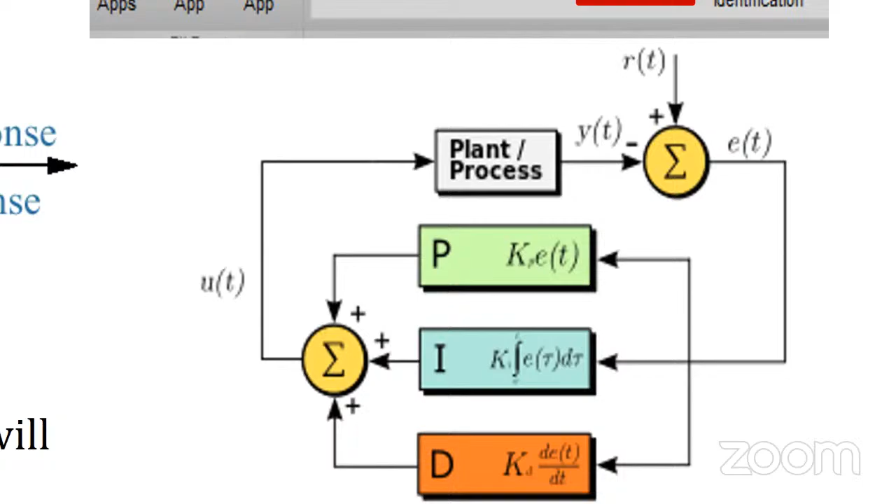Okay, so this is the basic idea of the control system.

So this is the design cycle. First we determine the physical system and specifications from the requirement. Then we draw the functional block diagram, whatever be my system. Suppose I am talking about the RLC circuit - resistor, inductor, capacitor - this is basically the physical form of a network. Now if I want to represent it in a block diagram based presentation, then we can do that way. After that, we can transform the physical system into the schematic.

In a schematic we can transform it, and after that the signal flow - you can see that the signal flow is in a particular direction, not in a haphazard manner. If I consider this is my reference input, the flow is like that way, this is unidirectional, and after that it will reach here, yt. If there are multiple blocks, you can consider these are basically the blocks. If I consider this is a multiple block for a closed loop system, we can use the block diagram reduction technique to reduce the number of blocks, and finally we analyze and test the system under all conditions.

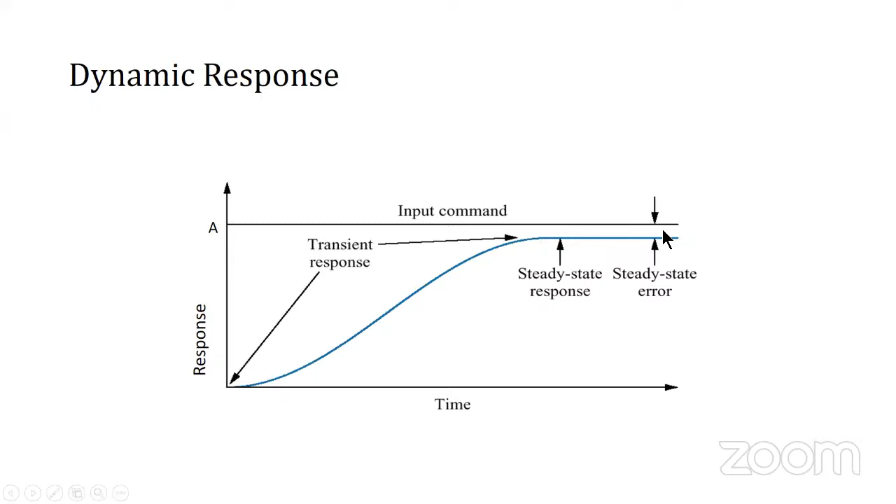So here you can see that this is my actual output, and this is my desired output - this is my input command. So if we subtract it, then you will get ESS, which stands for the steady state error.

Now next thing is the two types of control system. One is called the open loop control system, another is called the closed loop control system. So what is open loop control system? It is very easy - there is no feedback or no closed path. So without feedback, or a non-feedback control system, is basically called the open loop control system.

So here you can see, if you look here, there is a closed path - this is called the feedback path. But here you can see there is no feedback path, so without a feedback path, this is called the open loop control system. In this open loop control system, basically the control action is independent of the desired output or the controllable output. So here you can see this is our output, or the controllable variable. This control action is basically independent of the desired output - you can apply your input, but here you can get a certain output.

But in case of the closed loop control system, here you can see you can apply, you can use the transducer as well as the controller - this is called the summing junction. The main advantage of this open loop control system is that you can easily design that kind of system.

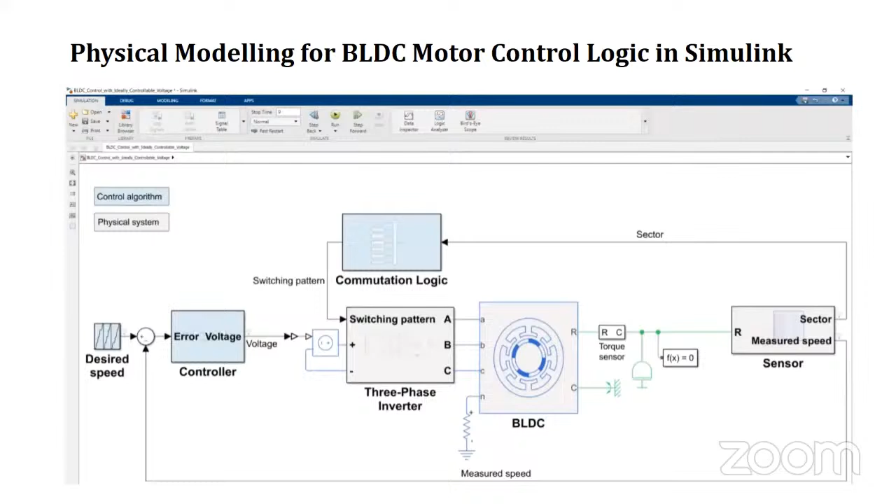For mechanical action, since we have to measure the speed as well as the torque, because we need to know the speed-torque characteristics of the DC motor, we should apply the torque sensor and other mechanical components. After that, if you simulate it, you will get that kind of output. For switching pattern, we can apply some pulse width modulation. So this is the physical modeling of BLDC motor in MATLAB.

I think you got some idea. So if I am talking about the open loop control system and closed loop control system, how we can approach these things, I think you got some idea from here. Now I am directly moving to MATLAB.

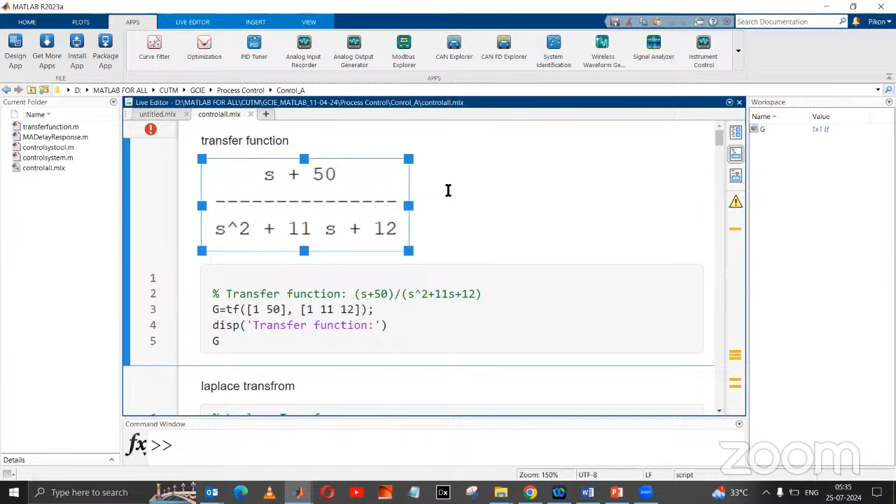Generally there are different types of transfer functions for different systems. So first, S plus 50 - this is represented by numerator and denominator, which represent the poles and zeros.

If TF equals 0, for which value or root the transfer function will be 0, then this root will be considered as the zeros of the system. Basically, the zeros of any transfer function are those values of S which make the transfer function, or G(S), tend to 0 or equal to 0. So for which values the transfer function will be 0, that is considered as the zeros of that system.

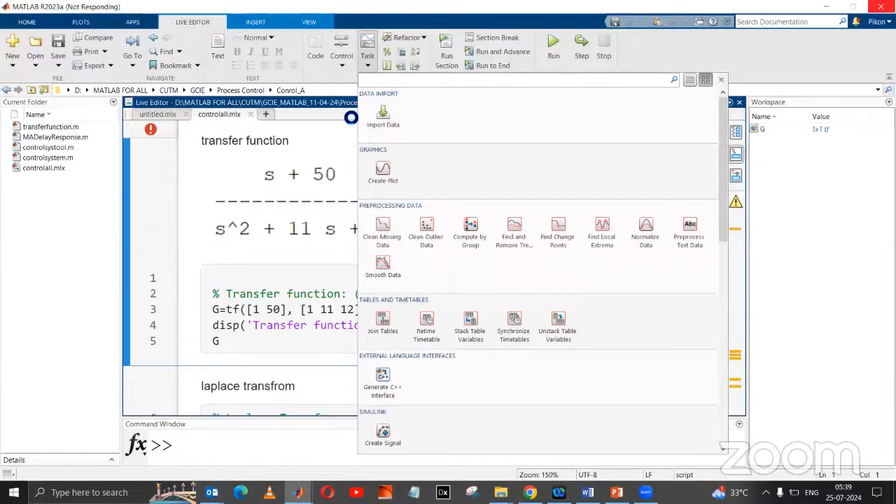In this live editor task, you can see this is the transfer function. This is my coefficient. What is the coefficient of S? 1, and it is 50. So it is written here as 1 space 50.

Next, S square plus 11S plus 12. So for S square, what is the coefficient here? 1, and the coefficient of S is 11, and it is 12. Now if I want to display the transfer function here...

It's running. You can display the transfer function here. You can represent the transfer function, and here you use TF, which is the built-in function to represent the transfer function of a system.

Next is the Laplace transformation. Laplace transformation is very, very important because we know that scientist Laplace basically proposed that transformation theory.

If you consider any linear system having the input RT, as I've shown you, and CT, which is basically the output of the system, this kind of input-output relationship can be described by the differential equation.

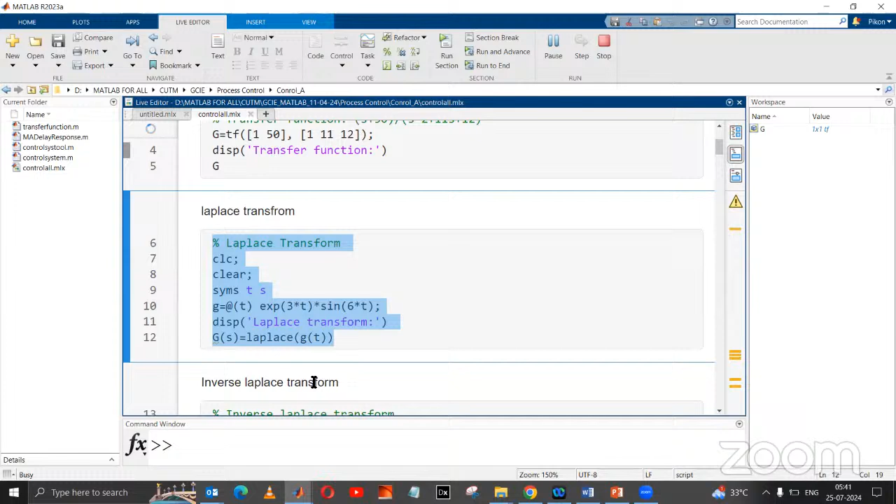Now, the differential equation we know: d2x/dt2 plus b dx/dt plus kx equal to 0. So this is basically my second order differential equation.

It is represented here. So this is my transfer function, tf. If I want to display the transfer function, I can write disp, disp, and what will be the value of g, that will be represented here, as we consider the transfer function to represent the transfer function here.

Suppose I want to transform this equation, or transform any function. If you want to represent any function, you can use the @ sign.

Laplace transformation works in such a way that whatever my function is, that function can be converted from time domain to frequency domain. Also, what is the advantage of the Laplace transformation?

What is the advantage of Laplace transformation? The advantage is that it will convert any differential equation into the polynomial form. Generally, higher order differential equations are difficult to solve.

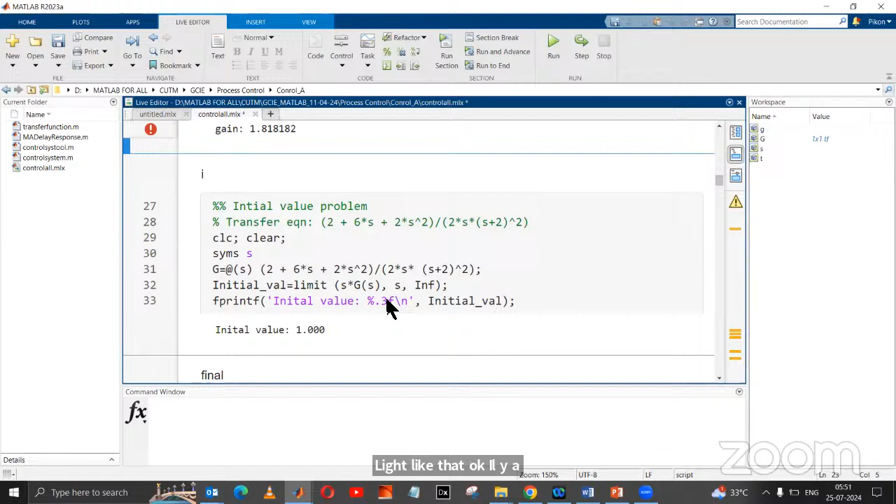Now next is the initial value theorem. I think it is known to you, but how we can write it in MATLAB. In case of the initial value theorem, the limit s tends to infinity. So as limit s tends to infinity, you write s*gs, limit s tends to infinity. That way you can find out the initial value.

Similarly, in case of final value, the limit s tends to 0. Here you write the s*gs, that way.

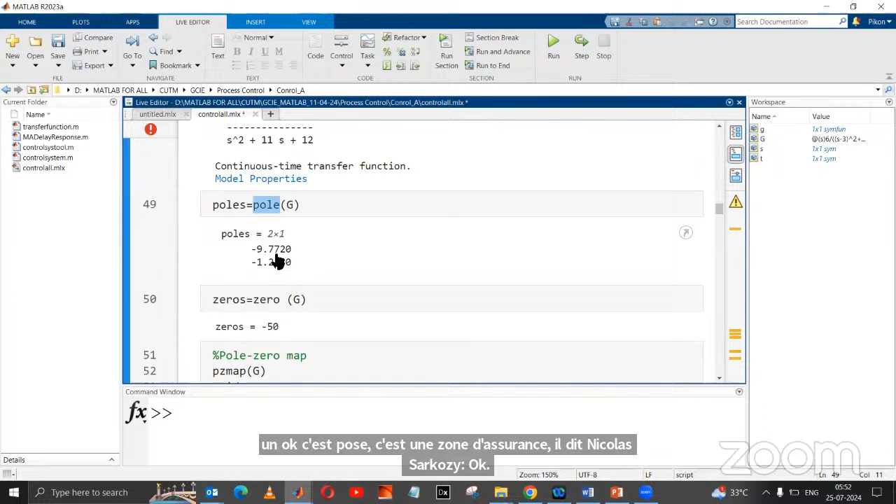Now it comes into the picture: poles and zeros of the transfer function. How can you find out the poles and zeros? Suppose this is my transfer function, already shown to you: s plus 50 divided by s square plus 11s plus 12. Now my objective is to find out the poles and zeros of that system. So if you just type pole(g), then you can get the pole of the system. For which value of s the gs or transfer function tends to infinity, that is basically represented as poles.

Yes, sir. Graph, sir. Hello, sir. Dr. P.C. Thakur, is there any question? You are not perfectly audible.

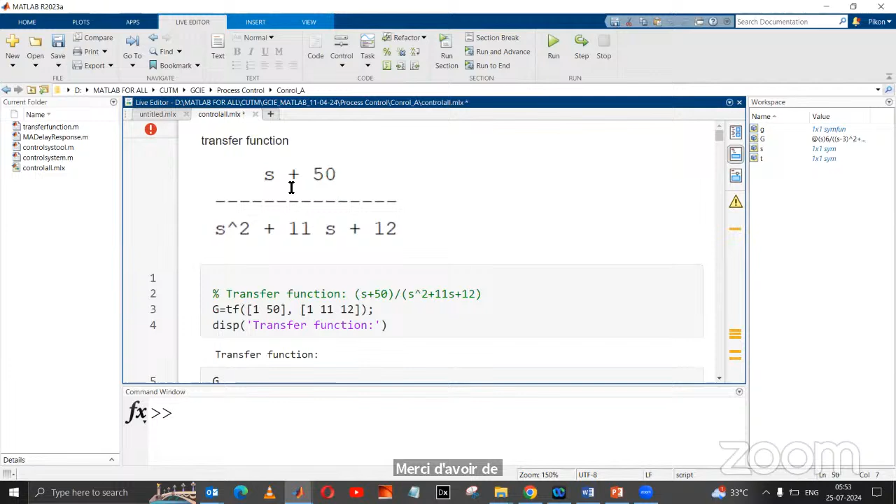Okay, next is the zeros. Zero is basically the zeros of the system. So zero is of course s plus 50. If s plus 50 equal to 0, s equal to minus 50. So for which value of s the transfer function tends to 0, this is basically called the zero of the system. To find out the zero of the system, just type zero().

One minute. Yes, so you can type here the zero of the system, zero. This is called the poles of the system, this is called the zero of the system. Have you understood, sir? Yes, sir. It's fine, fine, yeah sir. Okay.

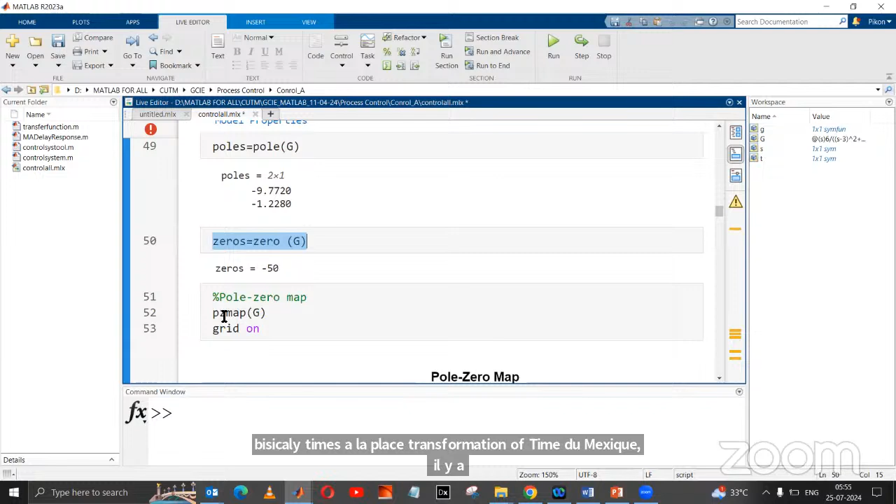Now next thing is important: how to find out the PZ map, that is called the pole zero map. Till now we have discussed how to find out the transfer function, we have used the syms function. Syms is constructing symbolic objects or symbolic scalar variables. We have used Laplace. Laplace is basically the function which finds the Laplace transformation of a time domain function. If you are handling any time domain functions, they will be converted into the frequency domain function by using the Laplacian operator. So you use the built-in function laplace, L-A-P-L-A-C-E, and to find out the time domain function again, you can use...

Sir, you are not audible. Dear participant, please stay connected, speaker has some technical issue, he will raise your hand. Yes, sir. Yeah, yes, sir. My voice is audible, sir. Yes, sir, audible, yes sir. Actually sir, network issue. Just a minute. So my voice, is it clear, sir, now? Fine, sir, fine, yes sir. Yes, sir.

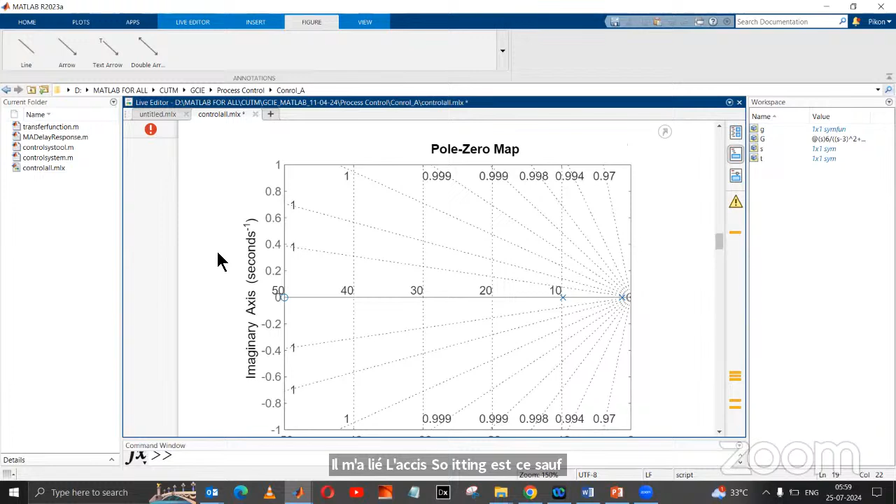So pz map, in MATLAB this is just one line of code, pz map. The pz map command basically plots the pole zero map of the LTI, any kind of LTI model or any kind of continuous or discrete time model. If you just type pz map and within bracket g, which is the transfer function, this command helps you find out the pole zero, not only the pole zero conversion, but also it will map it to this S plane.

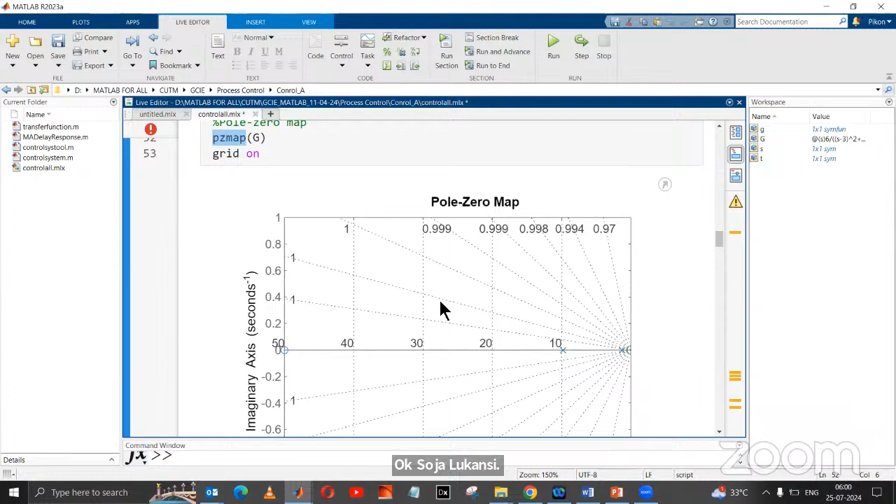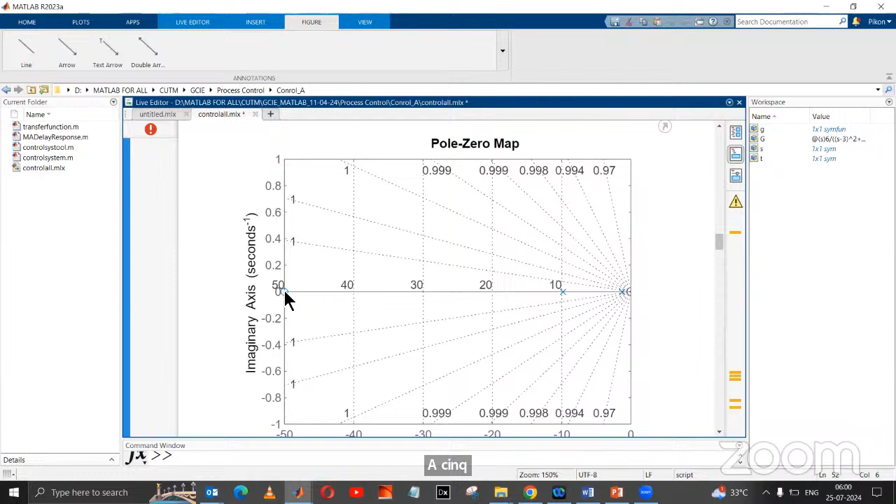So here you can see plus 50, and minus 9.7 minus 1.2. This is my pole, minus 9.77 minus 1.20 poles. Here in the real axis, these two poles are represented here, and this is the zero, at minus 50. This represents the zero of the system, minus 50, zero at minus 50.

Now the next thing is the damping ratio. Damping is very important because for any second order equation, suppose we are talking about the RLC circuit, the RLC series circuit, what will be the voltage equation?

Can anyone tell me what will be the voltage equation? Basically voltage across resistor is V equal to IR, and voltage across inductor is L di/dt, and voltage across capacitor we know is 1 by C integration of i dt. So for the second order differential equation, you will find that type of equation: V equal to IR plus L di/dt plus 1 by C integration of i dt.

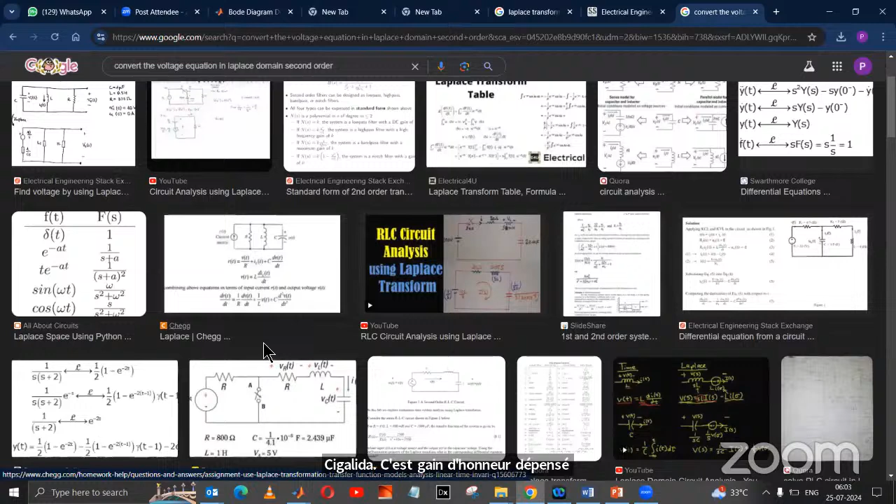So this is basically the equation: V equal to IR plus L di/dt plus 1 by C integration of i dt. If you convert it, you get the second order differential equation. So it becomes k omega n square divided by s square plus 2 zeta omega n s plus omega n square.

So if you compare, suppose you are applying a step response, a unit step input, to the second order system. Then you will find C(s) by R is equal to omega n square divided by s square plus 2 zeta omega n s plus omega n square. Here you will find the damping ratio, which is represented by zeta.

So here you can see, if zeta is greater than 1, it is called the overdamped system. If it is less than 1, it is called the underdamped system. And if it is equal to 1, it is called the critically damped system. If zeta is greater than 1, the system becomes more sluggish or slow in nature. If zeta equals 1, it is called the critically damped case.

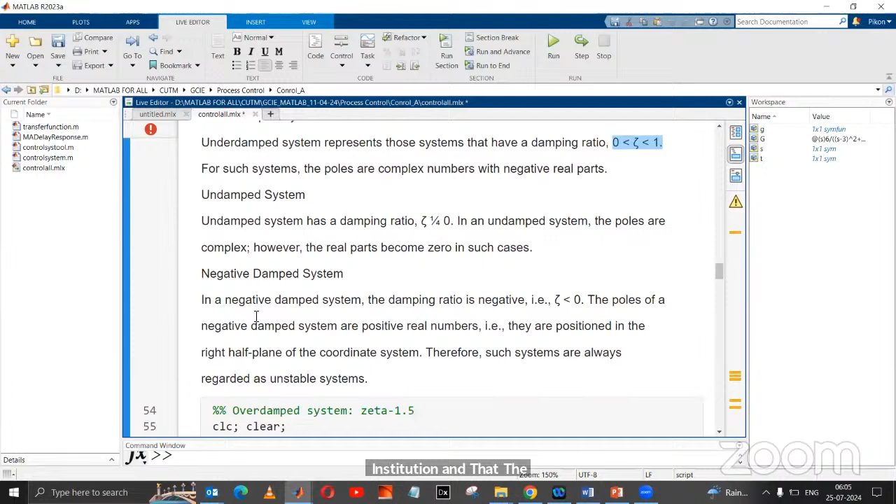Zeta equal to 1. For underdamped situation, zeta should lie between 0 and 1. Here you can see zeta equal to 1.5. What does zeta 1.5 mean? It is greater than 1.

So then you will see that k omega is represented like that way. Omega, this is zeta, and this is my transfer function. You can display that transfer function is like that way.

And you can see the step response. This is the step response. So on this transfer function you have applied the step response: step G. Here you mention the omega value, zeta value, and you can create the transfer function.

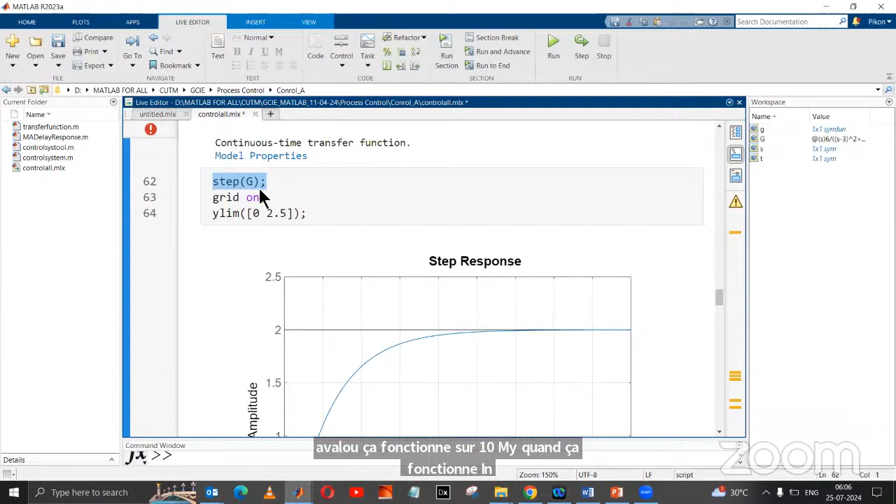So this is my transfer function in case of an overdamped system, where zeta value is greater than 1, I mean 1.5, and after that you have applied the step response. Just type here step, and it will apply on the transfer function, and you will get that kind of response. Now the limit is 0 to 2.5.

ylim? You can limit your x-axis and y-axis by using the functions ylim and xlim. So this is ylim, the limitation of the value in the y-axis, and limitation of the value in the x-axis. So this is confined in 0 to 2.5, within 2.5, and here the x-axis is 4.5.

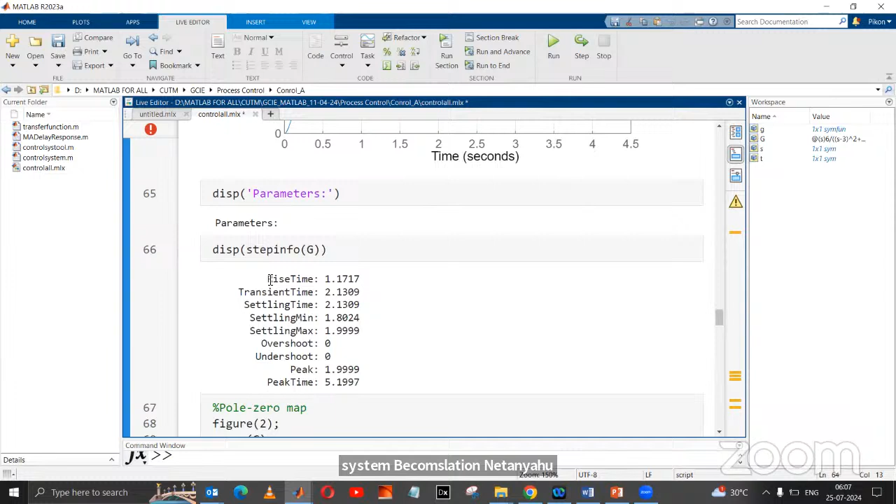So the system becomes sluggish in nature, meaning after the transient response, it will slowly reach its steady state response. So from here, if you want to know the information of the parameters, this is very important, because

Zeta is basically the ratio of the actual damping and critical damping, but some parameter is more important, because this parameter basically shows the performance of the control system.

I will show you some advanced examples also, but here you can see from this curve, I want to know what is the rise time, what is the delay time, what is the peak overshoot, because you are applying the step response to the overdamped system.

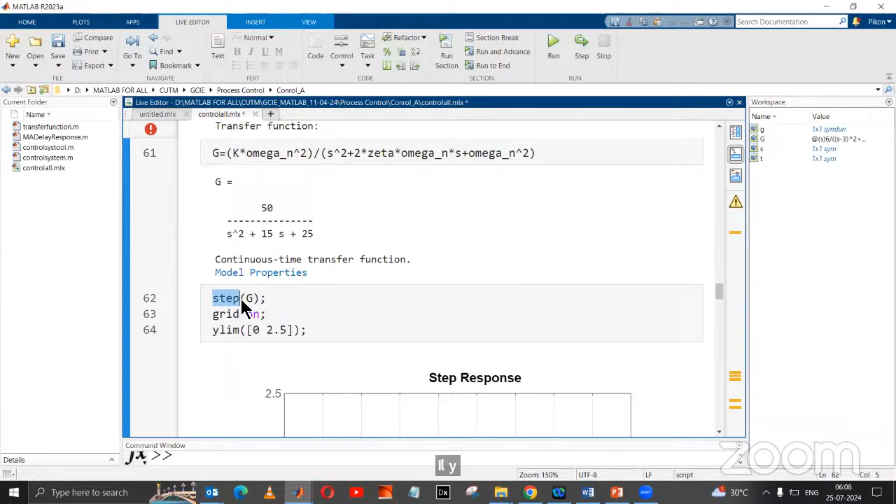Apply the step response, you are applying the step response to that overdamped system, correct? Overdamped system, and you want to know its response characteristics, transient response characteristics.

So within transient response characteristics, you will find some basic parameters like delay time, called TD, rise time, called TR, peak time, called TP, or maximum peak overshoot, represented by MP, or the settling time as well as the steady state error.

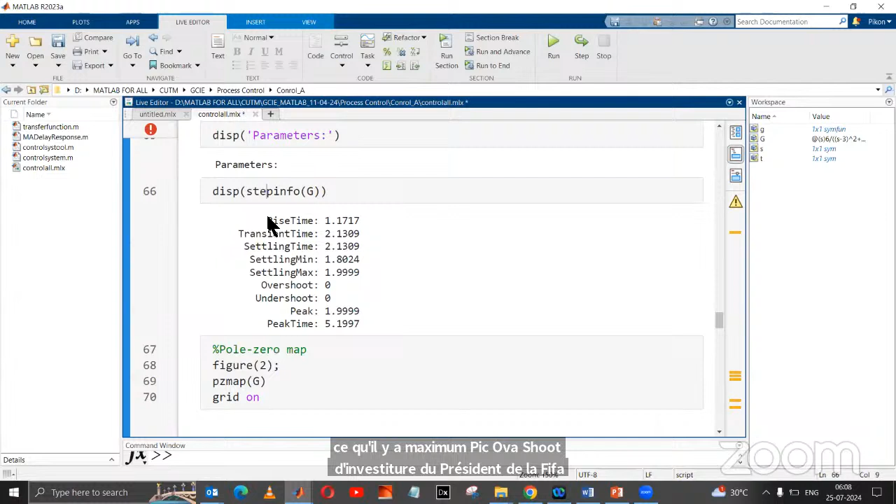So this type of information you will get easily by using the MATLAB command. If you want to display the step info of G, you want to know the information of the rise time, transient time, settling time, minimum settling, maximum settling, and whether any overshoot is there or not.

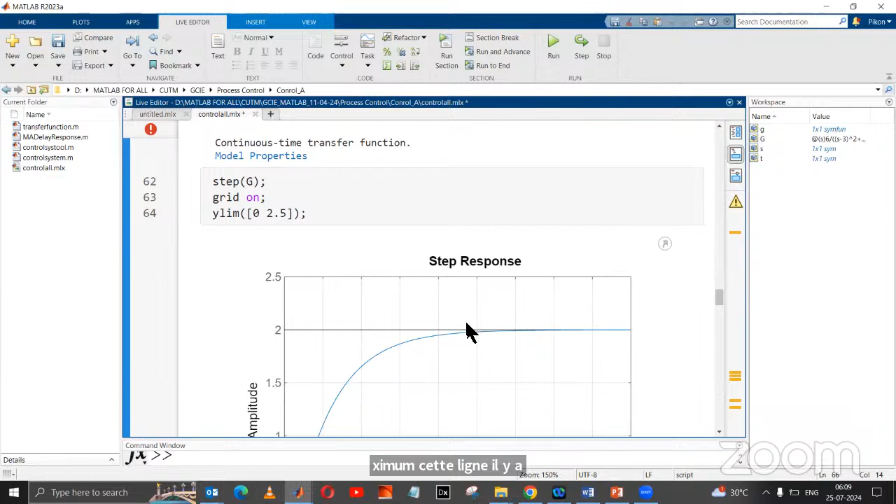As there is no overshoot or no oscillation which does not cross that line, that's why no overshoot is there. So overshoot is 0, no undershoot is there, so that's why it is 0, and the peak value is 1.99, almost equal to 2, and this is the peak time, 5.1997.

Now I want to display the PZ map here. So here you can see that the poles and zeros will be represented in the overdamped case. So this is the overdamped condition case.

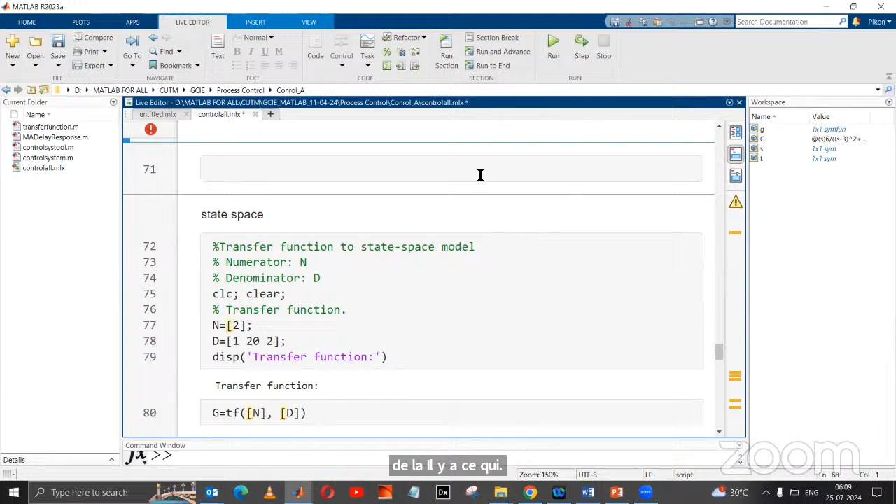I think it is clear to you. So from here you can see the pole zero mapping.

Next is the state space model, transfer function to state space model. So why is state space important? Basically, in previous lectures, any linear system was represented by transfer function or block diagram.

Now, if we consider any type of system like time invariant system or time variant system or MIMO system, that is called multiple input and multiple output system, in that case the system behavior is represented by the state variables.

So you have to determine the state of a system. That is represented by the state space analysis or state variable analysis. So if you want to know the state of a dynamic system, you have to apply the state space analysis technique, and you need this type of variables, which are basically called the state variables.

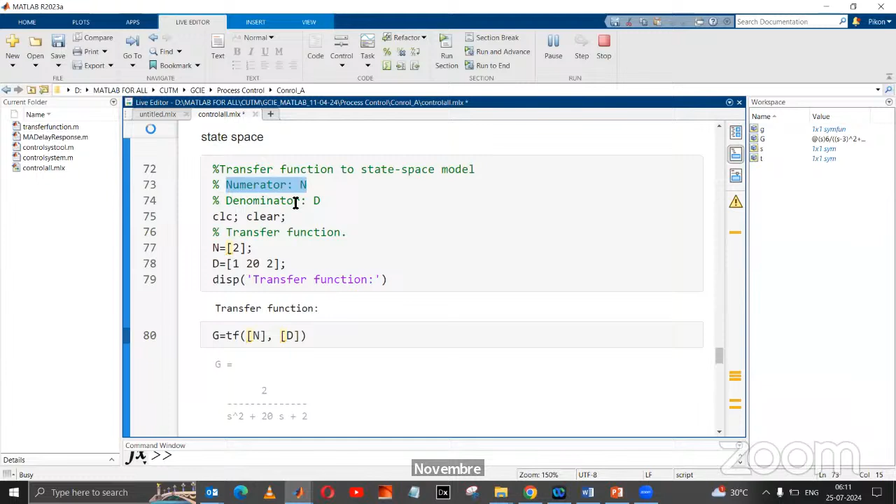Now, in case of transfer function, there are two types: if you represent the transfer function, one is the numerator, another is called the denominator.

Okay, now numerator is represented here. If you consider the numerator n equal to 2 divided by s square plus 20s plus 2, this is my transfer function: 2 divided by s square plus 20s plus 2.

Now I want to create the state space matrix or state space variables. Because if I consider any kind of physical network like an RLC network, if I want to represent it by any kind of state space matrix, then it can be represented that way. So I can convert any transfer function to the state space matrix, and this A, B, C, D is basically called the system matrix.

A is basically called the system matrix, B is the control matrix, C is basically the output matrix. So the equation is represented by the state equation format.

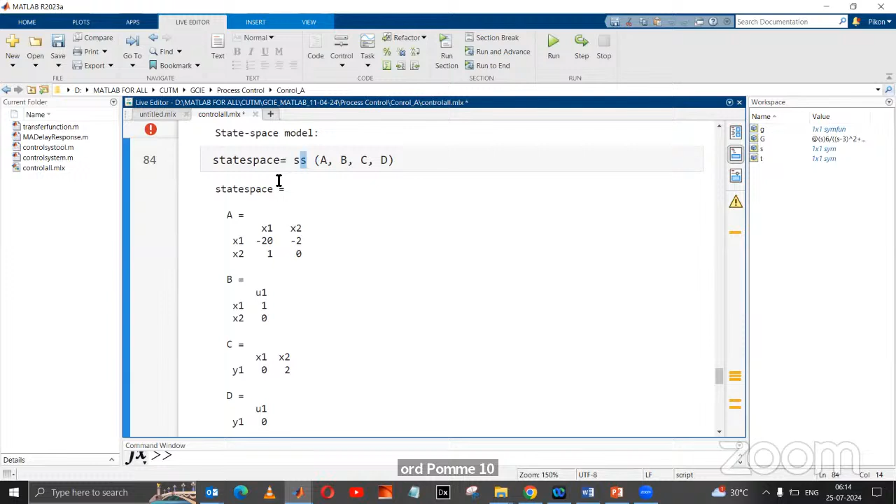If you want to represent the ABCD, you can type state space SS equal to A comma B comma C comma D, then ABCD will be represented here. So this is the continuous time state space model. I think you got the idea of how to represent the state space model and how to convert the transfer function to the state space model. So from here you can get the transfer matrix.

Next thing is important, that is called controllability and observability. This is very important because here you can see this is my state equation, x dot equal to Ax plus Bu, and y equal to Cx plus Du, where A, B, C, D are basically the coefficient matrices of that particular equation.

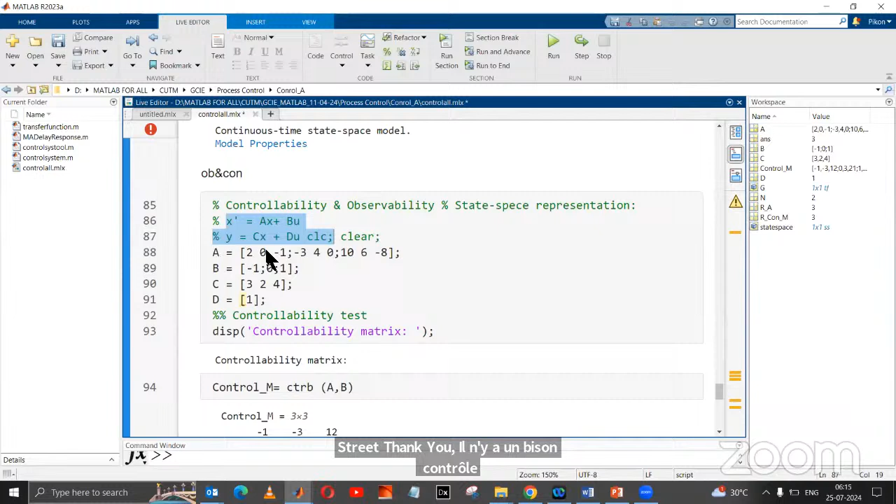Now the next thing is that we need to know if the system is controllable or not. We can say a system is controllable if the initial state can be transferred to the final state in a finite interval of time by some control u. So that's when you can say this system is controllable.

So this is controllable. There is a matrix, A is one matrix - A, B, C, D are the control matrix or the output matrix represented from the equation. Here you can see A is the system matrix whose dimension is 3 cross 3, and B is another matrix which represents the control matrix, and C is basically the output matrix, the row matrix, represented by space. This is the column matrix represented by the semicolon. And this is D.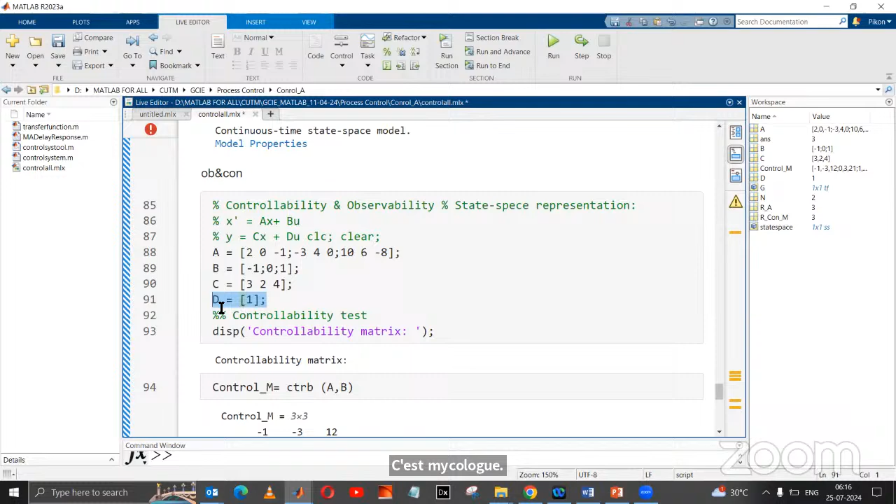So now I want to check the controllability and observability. Just to check if the system is controllable or not, you type CTRB. CTRB stands for determining whether the matrix is controllable or not. So from here you can check the controllability option.

Here you can see the rank of the controllability matrix. So from here you can check the rank of the matrix, if you want to determine it. So here this is my controllable matrix, and there should be some non-zero rows to check whether the system is controllable or not.

And here you can see, we first find the rank of that matrix. So this is my matrix, and from here you can find the rank of that matrix.

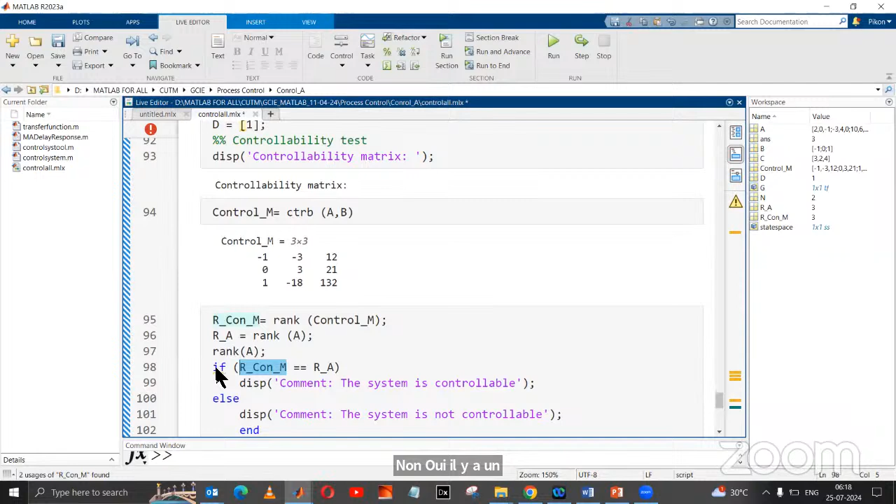Next we check also the rank of the matrix A, which is basically the system matrix. Now we need to compare the rank of the A matrix with the rank of the controllable matrix. So this is my conditional statement: if this equals this, then we can say the system is controllable.

So first, from here we can assign the A B C D matrix. After that we first find the controllable matrix that is achieved from the CTRB function. After that we check the rank of these two matrices, rank A and rank of the control M matrix.

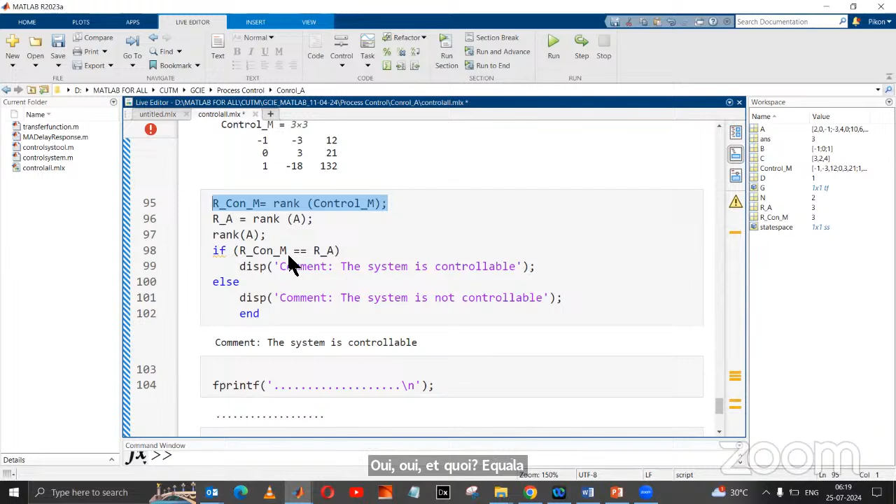And next, we equalize that if these two matrices' ranks are equal, then it is the rank of the matrix. So it may be 2 or 3. If these matrices are equal, then it is called controllable, and if it is not equal, then it is uncontrollable.

So this system is controllable. You can check that there is a non-zero element there. So the 3 rows are having the non-zero elements. Non-zero rows are there. I mean, if all the rows are zero, then it will be discarded.

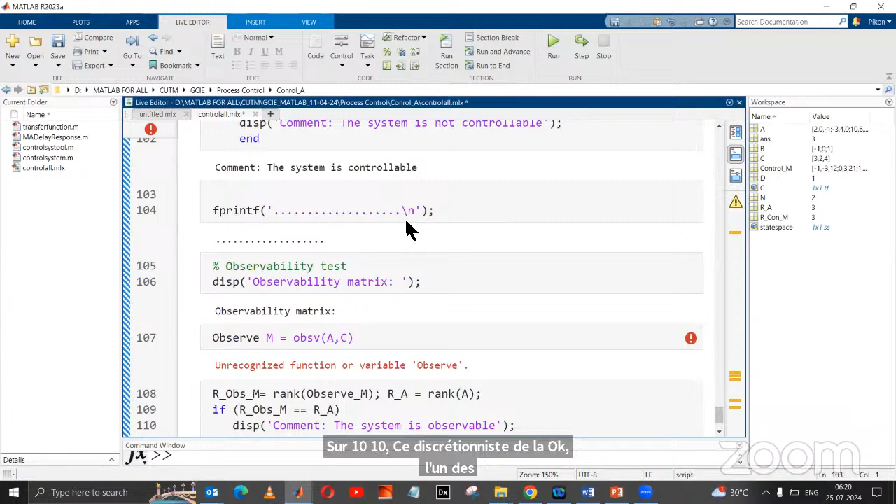Similarly, you can check the observability also. So you can use the function that is called OBSV, that is for the observability, and after that you can check that the matrix is observable or not.

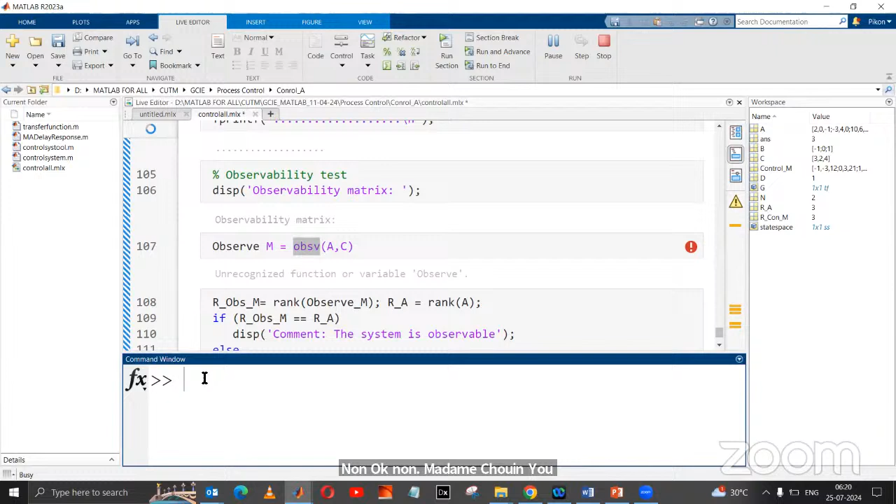Now I am showing you the control designer app and PID tuner app. This is important. PID stands for proportional, integral, and derivative control. I think it is known to you.

I think this screen is visible. So this is the engine design in the Simulink platform. So here I am showing you, and from this example, I will show you how the PID tuner app will work to control the speed of that engine.

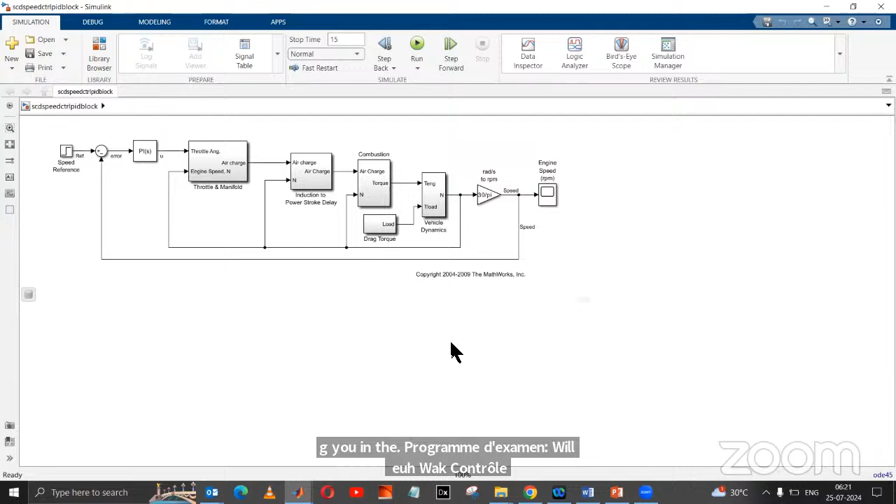I think this screen is visible. Speed control of PID block is visible. Yes, sir, visible. Okay, so this is PID control block. Just click here and hit space. Then this whole design will fit to that window.

So basically, this example shows how you can automatically tune a PID controller block using the PID tuner. So there you can see this is my speed reference. You no need to understand that kind of thing in detail for now - that is the induction to power stroke delay or drag torque. That is not required for now. If I consider this is my plant, okay, this is my plant.

So what is our basic component? This will be our plant. This is my controller, this is my reference input, and from here you will get the output. So to measure the speed of the engine, you can add a scope here. So this is called scope here.

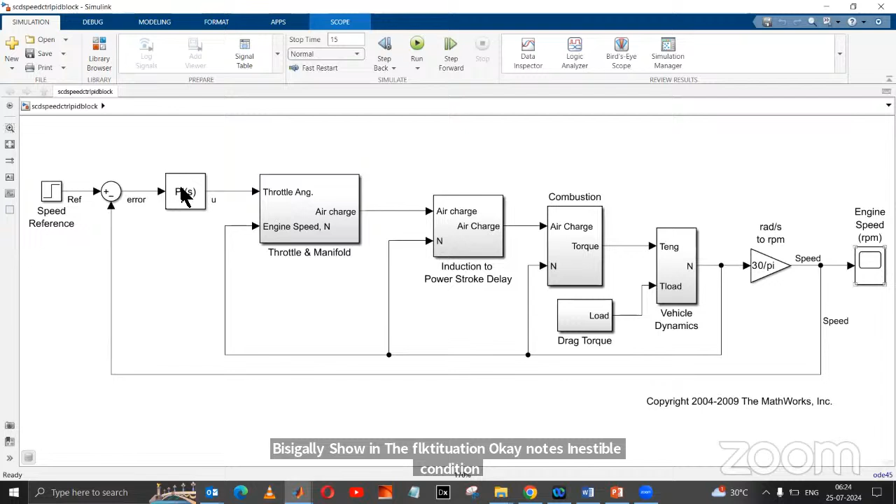So before launching the PID tuner app, I want to show you that while any reference speed is given to that particular system, you will see the engine speed, which is basically showing fluctuation, not in a stable condition. So you need to incorporate the PID controller, as well as tune the coefficients of P, I, and D individually. Either you can do it manually, or by using the PID tuner app you can check the robustness. Just a minute, it is opening now.

So what are the main parameters? Suppose if I am talking about the parameters, that is the settling time, delay time, rise time, peak overshoot. These are basically the important parameters.

Now I want to design a system which should be controlled. If I am giving you a challenge, that the system should be stable within 5 seconds - stable within 5 seconds or 4 seconds. So the settling time under 5 seconds.

And if I am telling you that there will be no error - no steady state error. So ESS should be 0. So we have to tune the parameter in such a way that it will achieve the ESS value equal to 0, and the settling time TS equal to 5 or less than 5.

Now I want to create the Bode plot for this particular system. In stability theory, the Bode plot is very important, where we have to find out the magnitude and phase to know the stability of the particular system.

So here you can find out - in control system design, you can see the edit architecture. If you click on it, you will find different types of options, I will show you in the app. Next there are different tuning methods. And if you create any transfer function like a first order equation, one divided by s plus 1, and import it in the control system designer, it will show two plots: one is the magnitude plot and another is the phase plot.

Bode plot is basically a graphical representation of any transfer function to determine the stability of the control system. So here you can see that if you apply the step response for that particular system, you will get a response that is represented in a curve. So basically one plot is the phase plot, another is the magnitude plot - these two separate plots will be there, and in one plot the magnitude will be represented in dB.

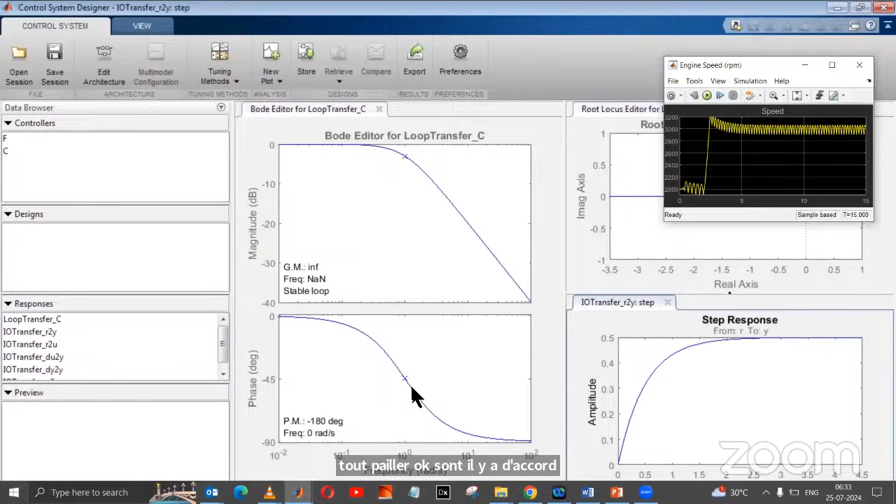Here you can find out that thing, just a minute... okay, yes, it has appeared. So here if you click on edit architecture, you can select different types of architecture here.

So in the tuning editor, there are different types of tuning editors: the Bode editor, or the closed loop Bode editor, Nichols editor, or the root locus editor. And different types of tuning methods are there - PID tuning, optimization based tuning, etc.

Okay. 1 minute. Okay.

So from here you can see, you can add poles and zeros to the particular system. And here you can change the phase margin as well as the gain margin will be changed.

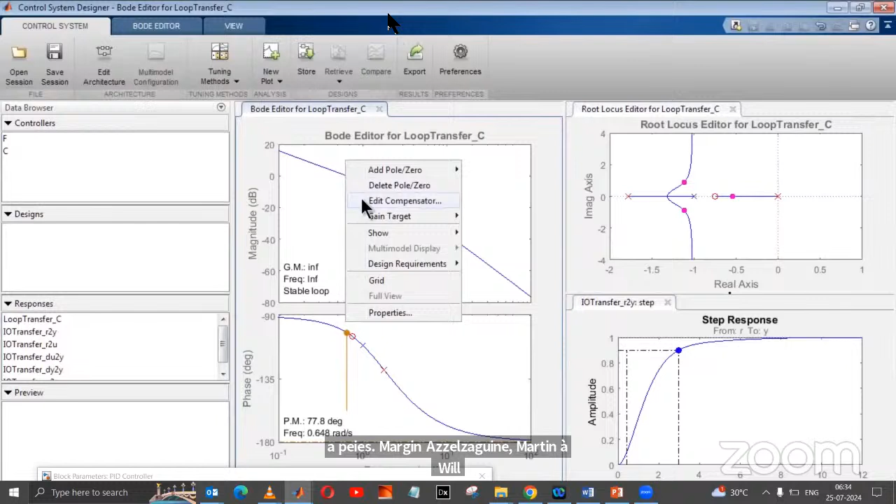So here you can use the lead compensator. You can change the zero, pole, or the phase angle, etc., and also the frequency.

So at frequency equal to 4, this is the lag lead compensator. For the lag lead compensator, you can see how the gain margin is changed, how the phase margin is changed. Gain margin is basically the margin in gain which is allowable till the system actually reaches on the verge of instability. So this is called the gain margin.

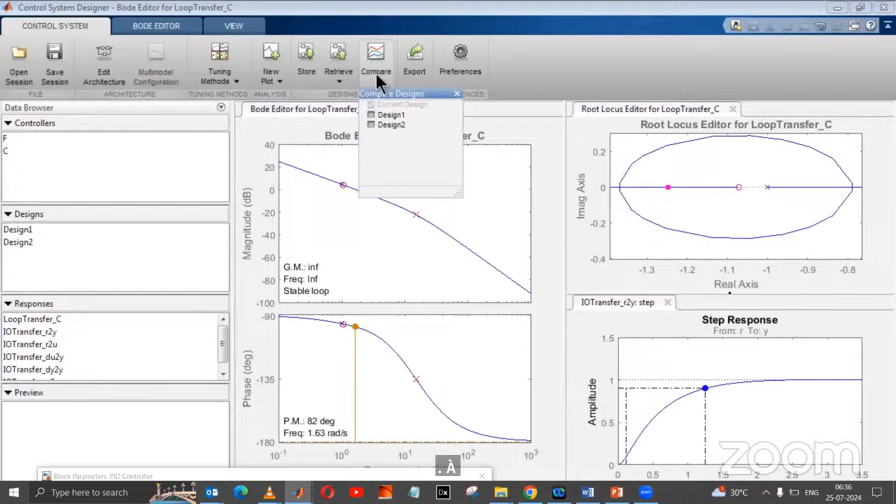And phase margin is for additional phase lag, which can be introduced without affecting the magnitude plot. So it is basically the amount of additional phase lag which can be introduced in the system.

So here you can see the different types of tuning methods, like optimization based method, PID tuning method, LQG synthesis are there. So you can export the controller to the workspace. Like that way, you can export the controller.

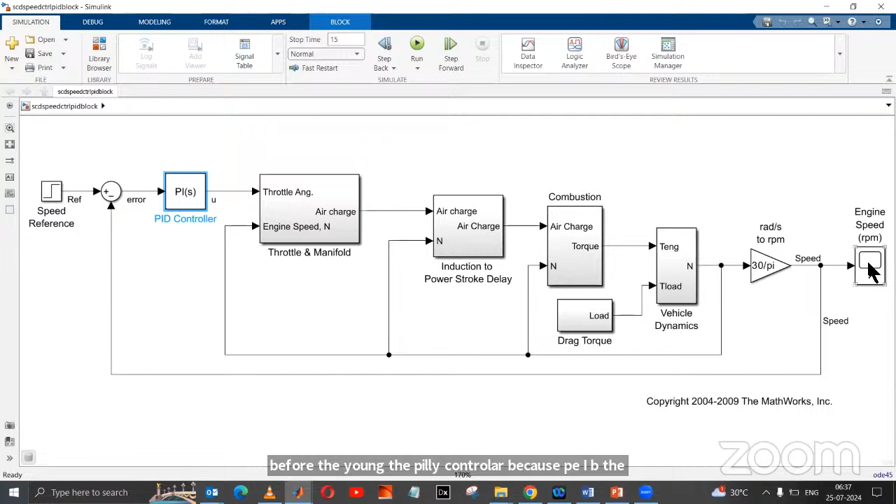I want to tune the coefficients of that controller, but before that I need to know what is the response of that controller, of that system. So this is my response of the system. I think while the input is given, you can see that is my fluctuation, that is my speed response.

So this is the initial speed response without modulating or without modifying the PID tuner PID coefficients. Now my next objective is to tune the parameter, tune the coefficients of it.

So next I click on the PI block, the PI controller block. So while I click on the PI block, then this window will open. Here it is written, this is the PID block. This block implements continuous and discrete PID control algorithm and includes advanced features such as anti-windup, external reset, and signal tracking.

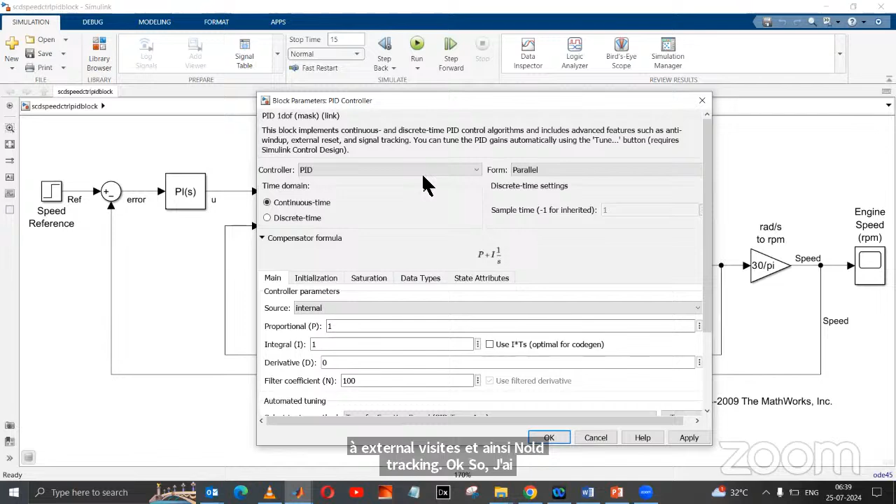So here this is my controller, this is my PI controller. You can select the PID controller. If you select the PID controller, then you can see that proportional control coefficient is 1, integral coefficient is 1, derivative is 0. You can select PI controller also. So here you can see only for PI controller, the proportional coefficient is 1, integral coefficient is 1. So you can select the form here. This is my compensator formula.

And now there is an option called select tuning method. Select tuning method transfer. There are two options: one is the frequency response based, and other is the transfer function based PID tuner app. So you can tune it from here.

So you have selected. If you want to open or tune by the PID tuner app, then you have to select that option and click on tune. So while you click on tune, then a window will open. So when you click on tune, this PID tuner app launches.

And basically this PID tuner shows the initial response.

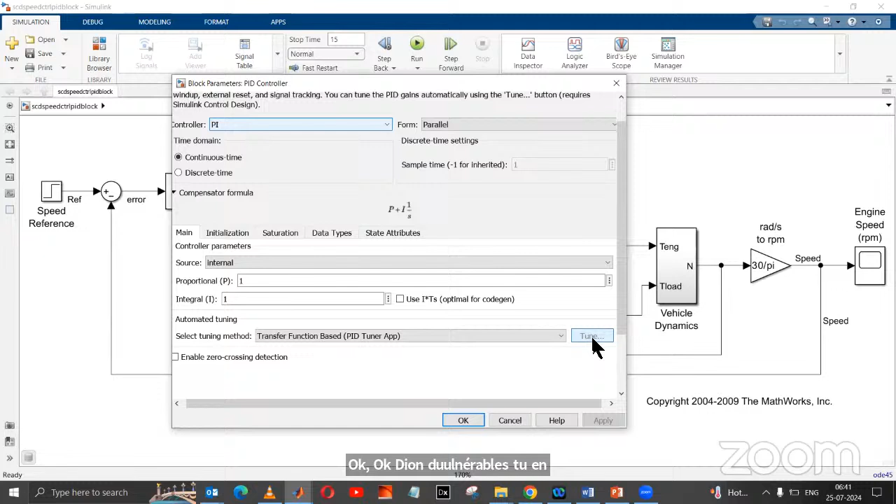Tune and then apply. I click apply to these changes, and then tune.

One minute. I think it is opening. Just a minute.

So now it has obtained the plant model, linearizing the plant model. So basically, this PID tuner computes an initial PI controller

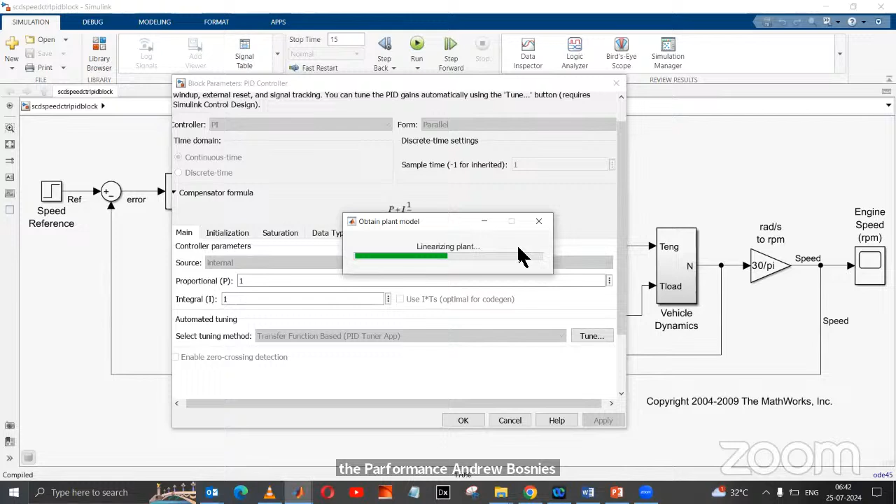to achieve a reasonable trade-off between the performance and robustness. So while you open the PID tuner app, you will find the option called response time. You can change the response time, and also you can change the transient behavior of this plant.

You can find how much rise time or the delay time is changing as your objective. If I am saying that your objective is to settle the system output within 2 seconds, and my objective is to settle it with zero steady state error.

So ESS should be 0, and the settling time should be less than 2 seconds. So if that is my objective, I have to tune the response time or the transient behavior in such a way that we can achieve this goal.

Just a minute. One minute.

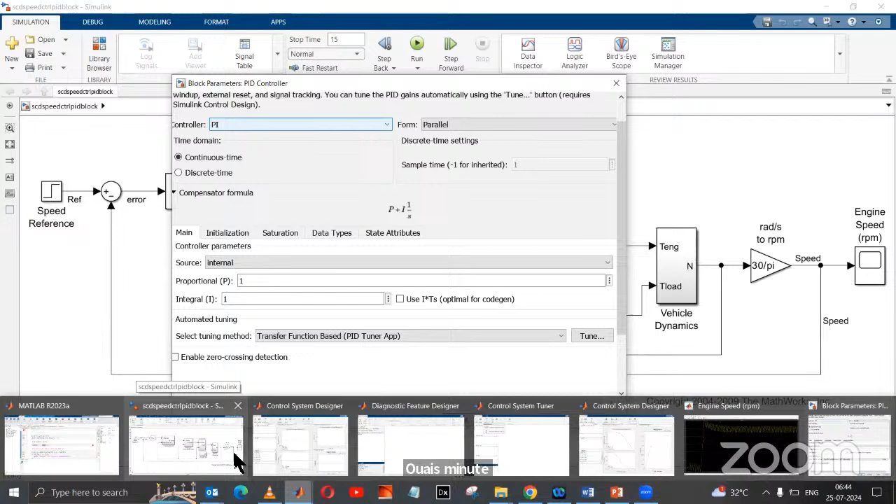So how can you build that kind of block? You can get all the system information from here.

This is the gain block. These are basically the subsystem. If you click on it, you can see that other components are there to create that kind of system.

This is the step response, or you can see it as a reference input, speed reference input, and here error signal is generated, and this is the scope. This is the Simulink library browser.

If you click on it, then you can find the different types of blocks here.

Okay, it is not opening. I don't know why. We will jump into the other app also, because I will show you some.

So this is the control system designer app that I was discussing previously. There are different types of architecture. You can see that edit architecture. If you click on edit architecture, you can find the different control architecture.

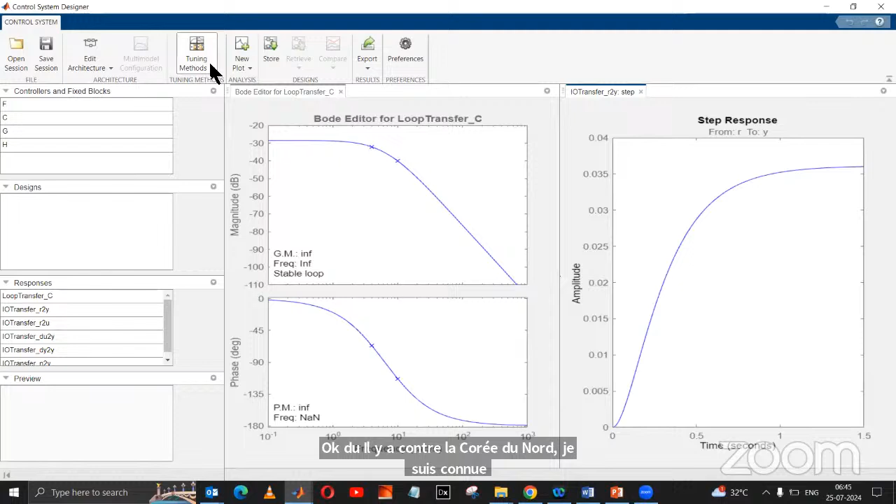So you can click on it. If you click on it, you can see the different type of architectural model, and you can also select here the tuning methods, different tuning methods, and you can export it.

Why it is not opening, I don't know. Okay, I'm discussing other problem. Just a minute.

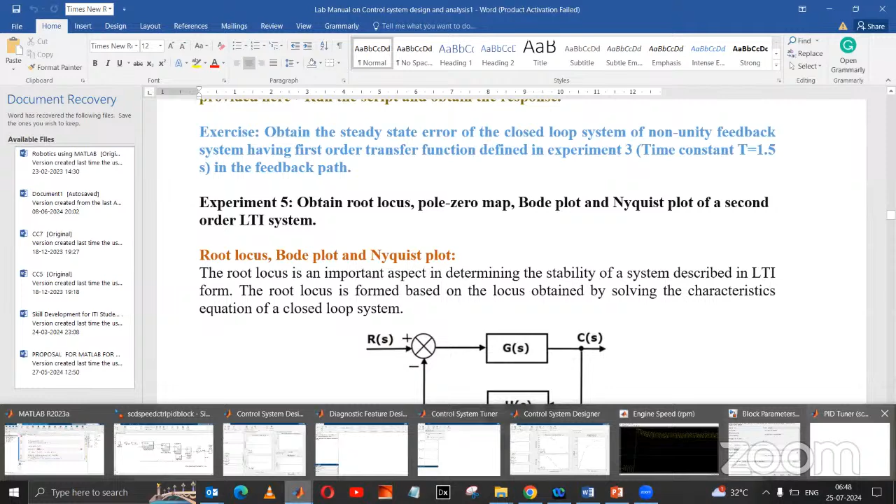Okay, I will show you. I will show you. Just one minute.

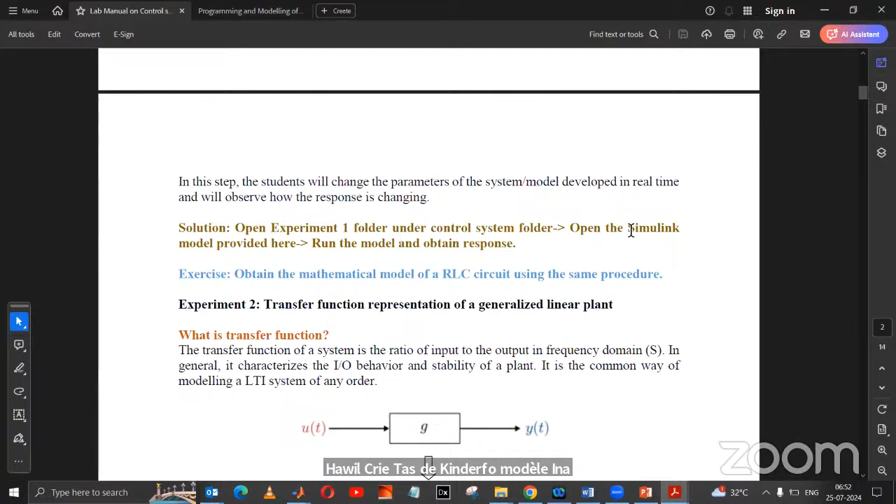cx equal to 0. So how will you open or create that kind of model in the Simulink platform? First, you open the Simulink model and you can run the model that way.

So first here, this is my Simulink model, I think it is visible. So if the equation is m*d2x/dt2 plus b*dx/dt plus kx equal to 0, okay, if I convert it that way, okay, cx.

So here you can see that this is my spring constant, and here you can use the integrator.

Suppose d2x, if x is the angular position, then if angular acceleration, if you integrate it, then you can get the angular velocity. And if you get the angular velocity, then if you integrate again, then you can get the angular displacement.

So there should be an integrator. There should be two integrators which basically convert the angular acceleration to angular velocity to angular displacement.

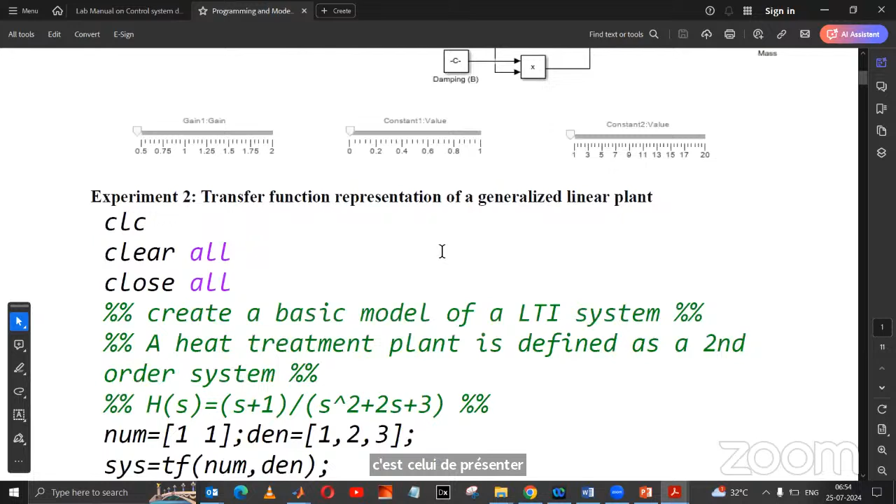Similarly, if it is considered as x, then you can type here x. So this will be represented in the Simulink model. Just I am showing that one.

I think it is clear to you that suppose if I am doing any transfer function, then I am representing the transfer function num equal to 1,1 and den equal to 1,2,3. And if I want the system transfer function, then you have to type here sys=tf(num,den).

Now, if you want to generate any particular signal, like suppose step input, u(t) equal to 1 while t greater than or equal to 0, and zero while t less than 0. So here, if the time is this, and this is the step, 0.01 step size, and 0:0.01:10 means the lower limit and upper limit with that step size. So for 1 to 100, all the values would be 0, and length time means the time of that length. So for positive time, the amplitude of the step input will be 1.

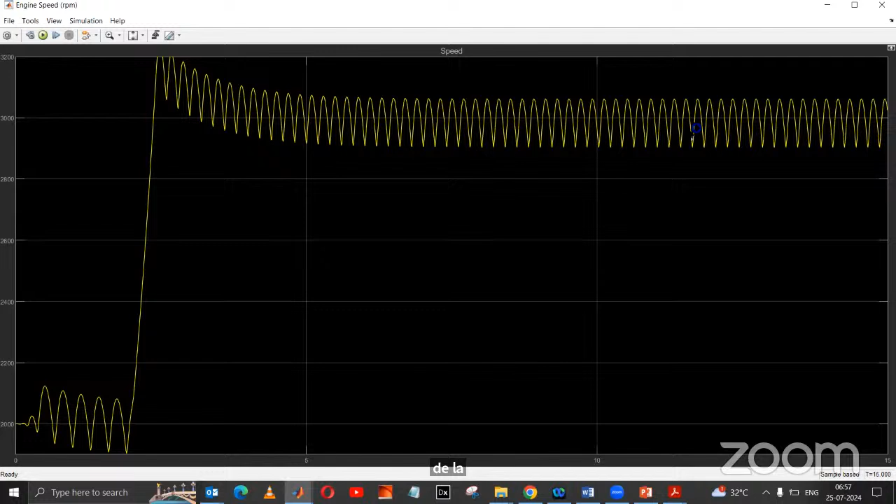Now my objective is to get a stable output. Suppose my objective is to get the output where the settling time is within 2 seconds, and the steady state error will be 0. Then you can open the PID tuner app.

So you can change the response time and the transient behavior, and you will see the parameters.

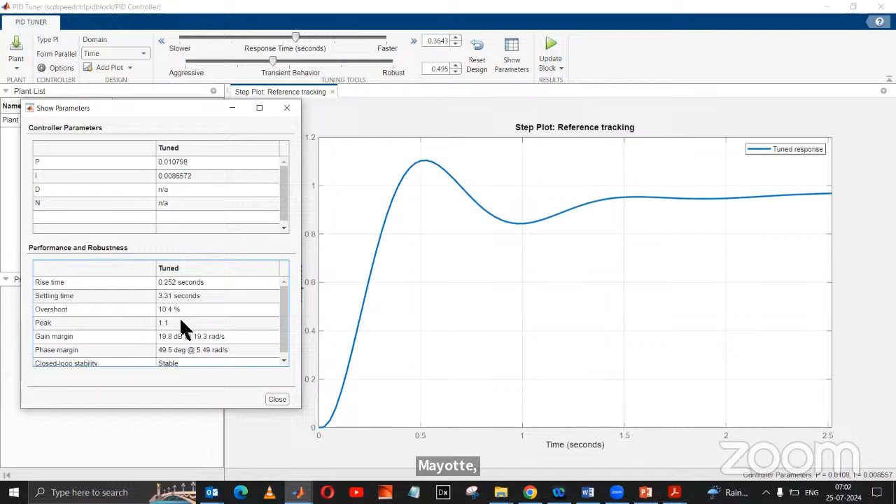Now if you change the response time or the transient behavior, automatically the value will be changed. On the left hand side, if you click on show parameter, you can see that rise time is 0.4 and settling time is 2.07, but overshoot is 18%. My objective is to minimize the overshoot. The overshoot is 18%, now it is 10.4. If you change the transient behavior and see the result, the overshoot is 28.8%.

So while the transient behavior is more aggressive, the overshoot will be higher. So if you minimize it, or change the response time, you can see the rise time and settling time also change. In that way you can find at which point you get your desired result.

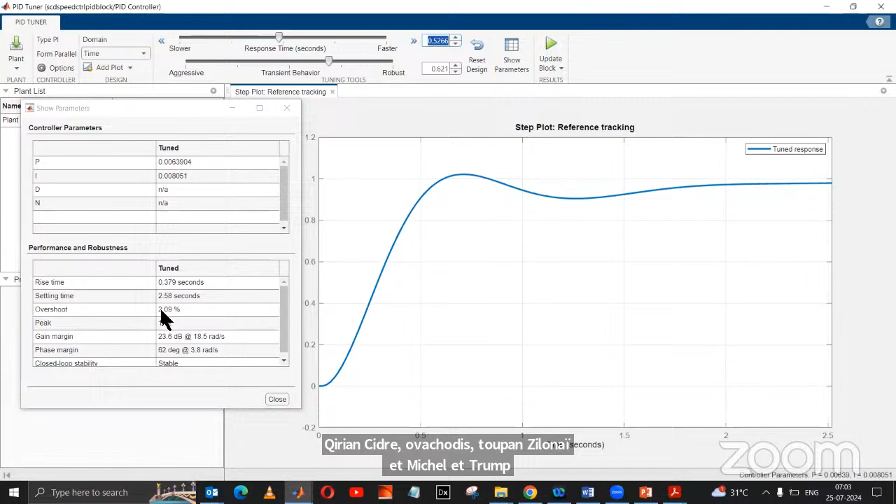You can change the transient behavior or response time such that the overshoot will be almost 0 and the settling time will be less than 2 seconds. So if I give the value here like 3.1, now you can see overshoot is 0.407, almost 0, but settling time is 3.45. The overshoot is almost 0, but settling time is greater than 2 seconds.

So it is not required. I can change the value again and see what happens here.

Right now overshoot is high, 8.32%, but settling time is 2.95. So here now you can see that settling time is 1.81 second and overshoot is 0%.

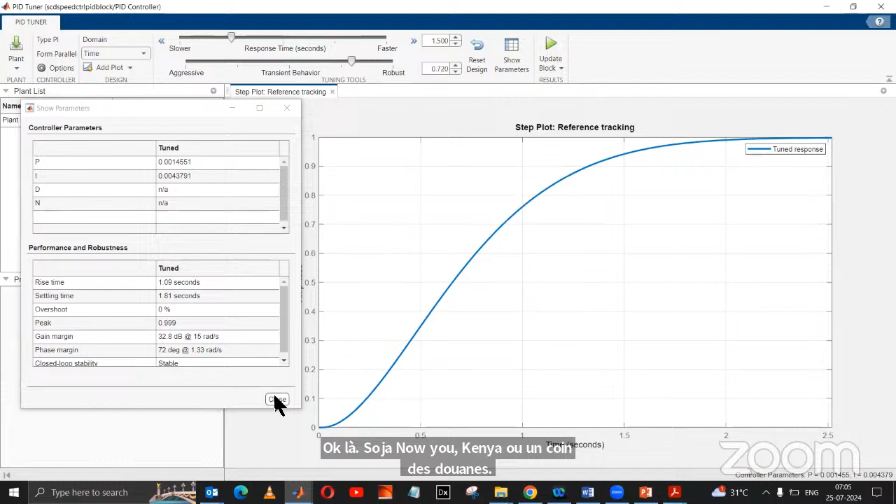So now it is okay, because if my challenge is settling time should be less than 2 seconds, then 1.81 seconds with overshoot 0 works. So I can finalize this.

This control parameter is my P value. Initially my P value is 1, and initially my integral coefficient value is 1. Now it is 0.0014551 and 0.0043791. So I can close it now and update the block from here.

Click on here, and if you click on it, then automatically the block will be updated. So now again I move to the SCD speed control block.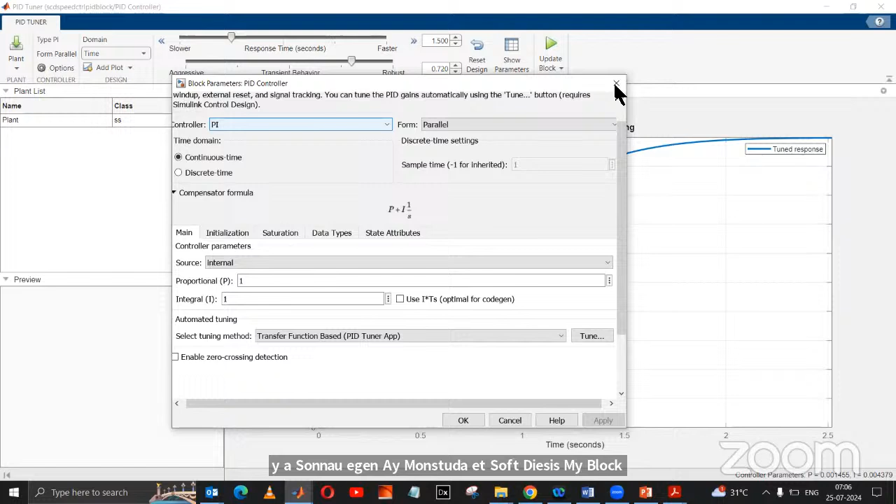This is my block parameter. You can close it now and check the block parameter value again. If you click on the block parameter value, then the value will be updated.

I think you have understood how it will work. You can either import your plant equation or import the Simulink plant model directly to this PID tuner app, and update the PID coefficient. After that, if you again simulate your program, then you will see the smooth response.

Though it is actually taking so much time because my computer is not responding, as lots of windows are opened now.

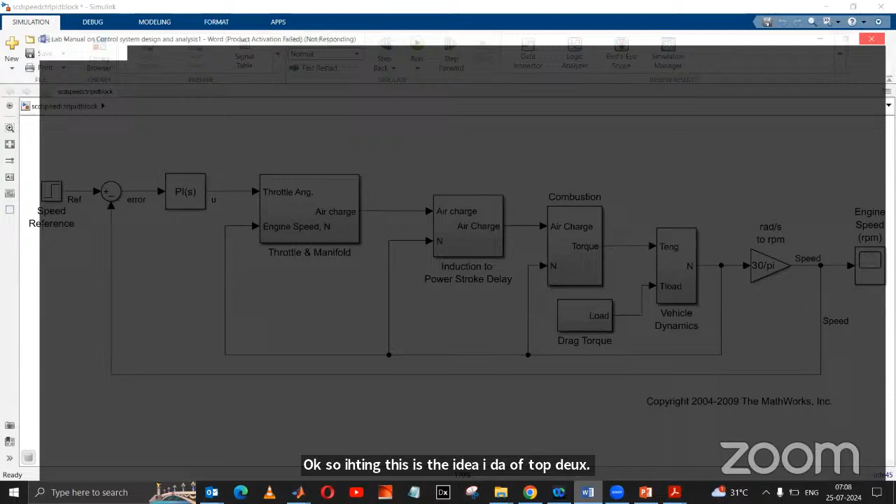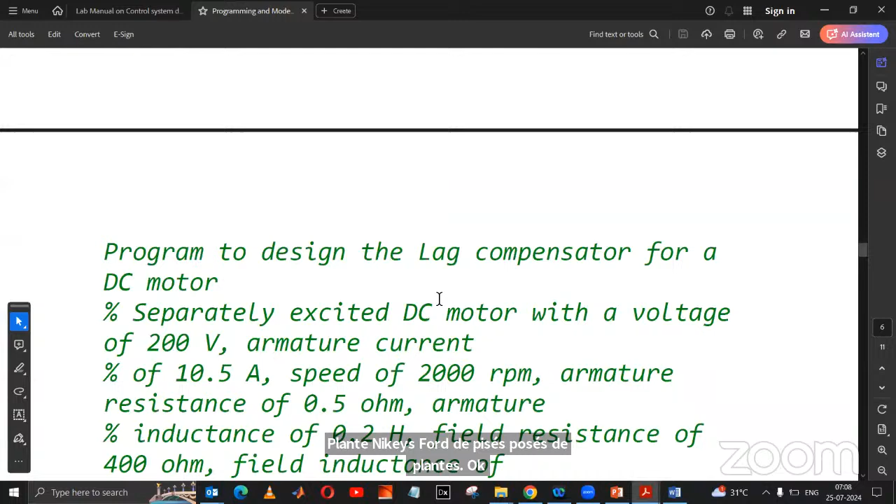So here you can just type the R value, L value, and the torque constant, back EMF constant. KB is the back EMF constant. RA is the armature resistance, and LA is basically the armature inductance.

After that, as it is an RLC circuit, in case of motor control you can see these are basically the armature, where you will find the RA value, LA value, torque constant value, as well as the back EMF constant value. This is the moment of inertia, this is the friction constant.

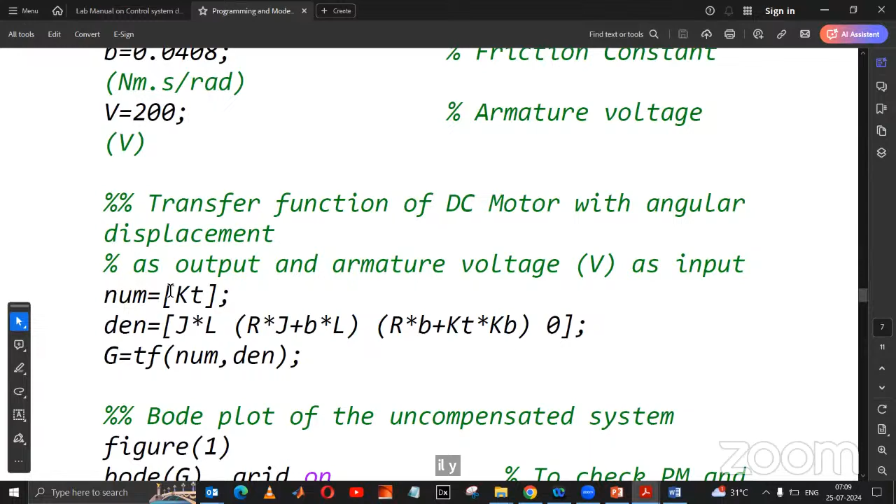So you just assign the value, and after that you can create the transfer function, that is num comma den, and after that you do the Bode plot for this uncompensated system.

So now if you apply the lag compensator, you type your desired phase here. So this is your desired phase. You apply the desired phase angle and also the phase margin. This is your phase margin, and this is the phase angle for the new phase margin.

After that you can create the lag compensator, and you can get the pole zero of this lag compensator. And while you apply the lag compensator to the previous transfer function, you will get the output - the compensated output.

So this is how you can design the lag compensator. This is how you can see the uncompensated system and the compensated system. This is your general output, and this is my compensated system.

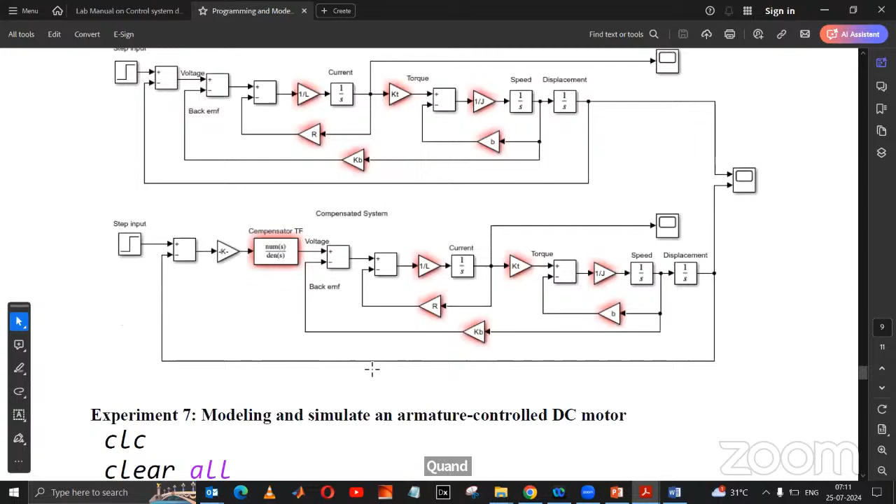Similarly, if you want to model and simulate armature control DC motor, means the armature current basically controls the DC motor. So here you can either connect the rheostat, you can do the rheostatic control. This is the damping. So if you want to control the resistance, if you want to control the speed of the motor by using the armature control action, you can do that.

Similarly, PID control action for the DC motor, you can see that this is my motor simulating model. This is my reference input step voltage, the DC voltage will be applied here, then it will reach the PID controller, then from here you get the control DC input. So DC voltage will be provided to the DC motor, and if you open it, you will find the simulating model of the motor, and eventually you will get that velocity, which acts as an output.

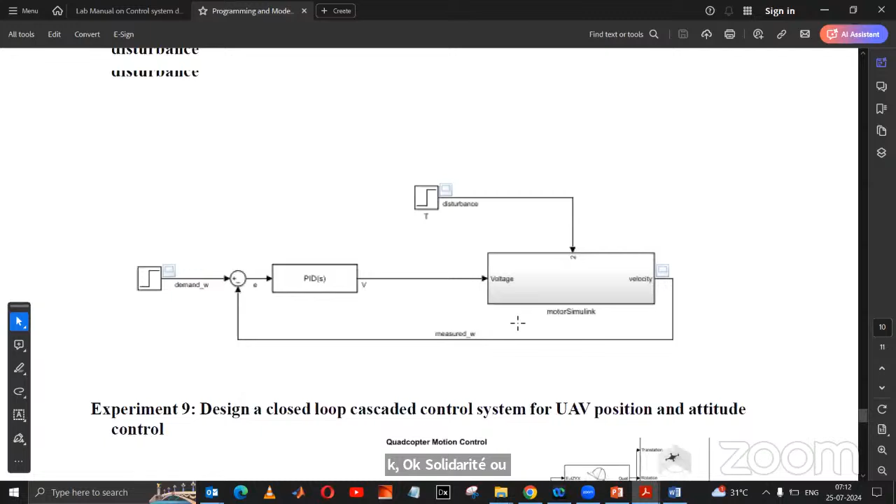After that, if you want to control the speed of the DC motor, you have to create that feedback path or closed loop. If you want to incorporate any disturbance, you can apply other type of signal here. So this way you can create the Simulink waveform, Simulink based PID controller model. This is the PID controller model.

Similarly, for advanced application, like suppose UAV application, in case of drone application, you can use the closed loop system. This is basically the drone model. So suppose I want to do the VTOL - vertical takeoff and landing. So for controlling the quadcopter motion, you will find the block from the UAV toolbox. UAV means unmanned aerial vehicle, you can say it as an unmanned aerial vehicle, or a drone.

Now basically here you will find two types of control. There are two types of sensors. If you use any drone, generally there are Pixhawk controllers, and in the Pixhawk controller there are gyroscope and accelerometer. There are also other types of sensors which control the azimuthal angle, control the altitude, or the XY control. So there is a gyroscope that checks the XY movement, desired XY movement.

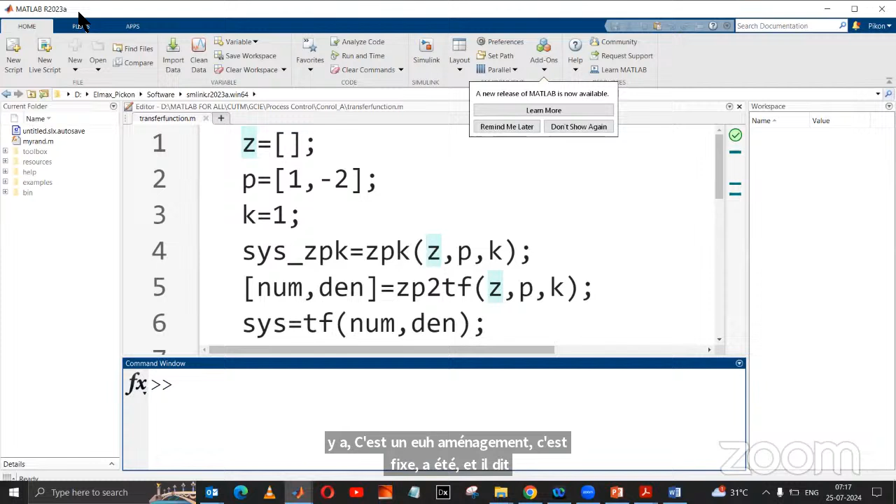So in case of 2023A version MATLAB, I mean the system requirement is I think 8 GB RAM, or 16 GB RAM. 16 GB RAM is better, but 8 GB is minimum. So this is important, and also there should be an SSD in your laptop or in your machine. So I will share this type of documents here.

And another example, another resource that I want to show, you can go to the MATLAB documentation page, I think it is very...

You can go to the MATLAB documentation page, and here you will find the control system toolbox. Just type in Google, and you can see the control system toolbox, fuzzy logic toolbox, and also Simulink Control Design. I want to show the Simulink model using the Simulink Control Design toolbox.

This Simulink Control Design toolbox is basically helpful for the Simulink model.

Sir, I want to conclude my session. If possible, if any participants are interested to know more about the control system, I can continue the discussion. If you have any question, please feel free to ask.